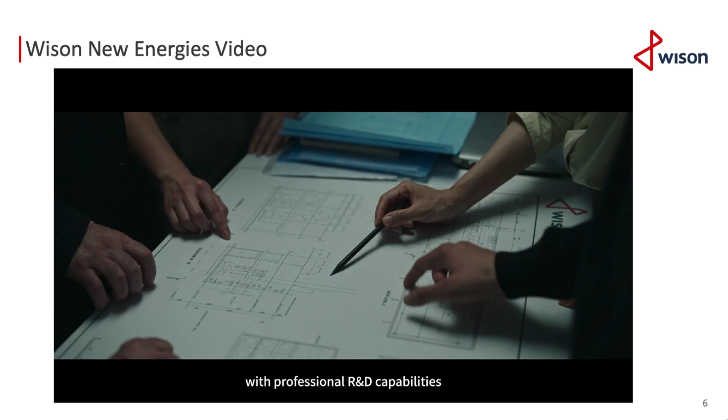Wison New Energies provides the global energy industry with professional and customized clean energy solutions. Drawing on extensive project experience, our international team continuously develops cutting-edge technologies with professional R&D capabilities. We integrate premier global resources and drive transformation by technology.

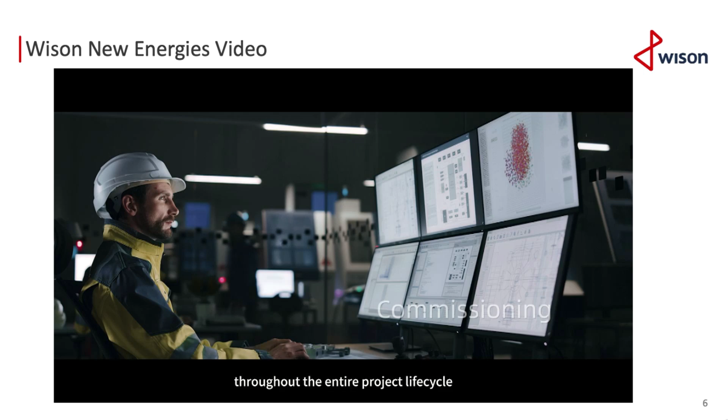Wison's robust project management and execution abilities, combined with our world-leading fabrication yards, enable us to deliver customized project services efficiently, safely, and with the highest quality. Our EPCIC solutions realize the complete resource integration throughout the entire project lifecycle, enhancing applications across multiple fields, and effectively promoting the integrated development of the entire industry supply chain.

We see endless opportunities in new energy. Lower cost, higher efficiency, broader applications, and less environmental impact, paving the way for an infinite future.

Let clean energy benefit our Earth. Let clean energy enrich every single life. Better energy, better life. This is our mission and our promise. We are Wison New Energies.

So that's where we are under all this philosophy we have, the mentality we have, and we're trying to position ourselves as a leading provider of clean energy solutions to the industry. What we present to the market is an integrated solution, starting from engineering all the way to commissioning of the floating unit that we present to the market. So every single stage along this process relies on our in-house resources, and I'm going to explain why.

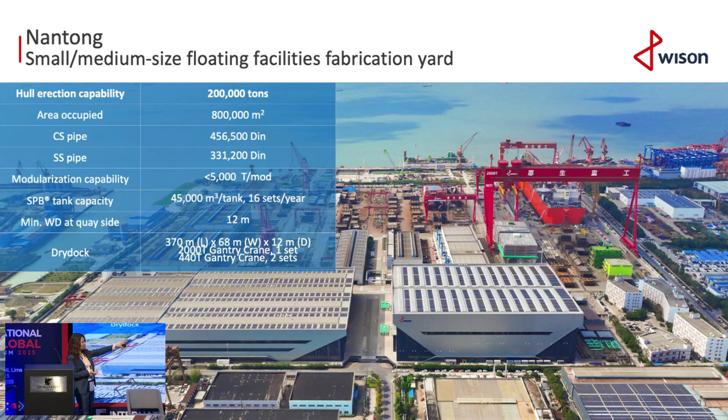This shows the geographic locations of all our 3 sites. Headquartered in Shanghai, where all our engineering and procurement teams are based, and the 2 yards are positioned in a very convenient way. That really helps minimize logistics and management overhead between all locations during a project.

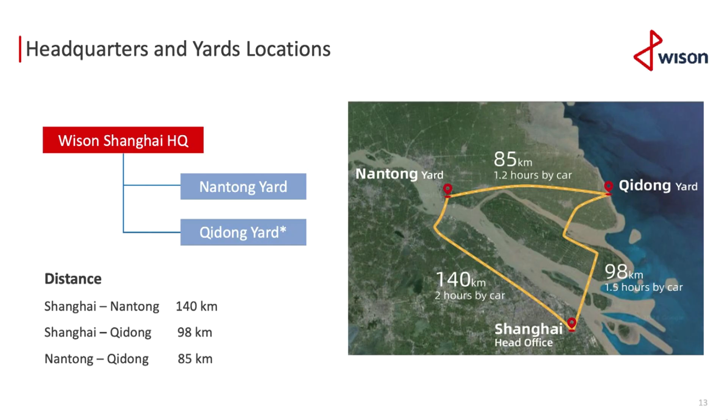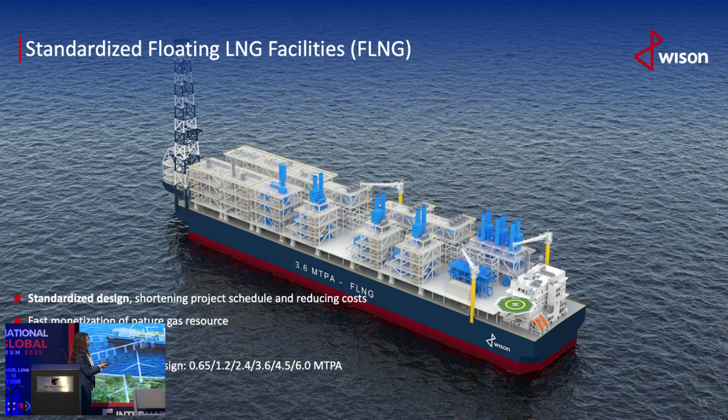I just want to highlight a few core products we offer to the market. FLNG, ranging from 0.65 all the way up to 6 MTPA. The reason we start with 0.65 is that anything below that wouldn't make the project commercially viable, so anything smaller would need a different approach.

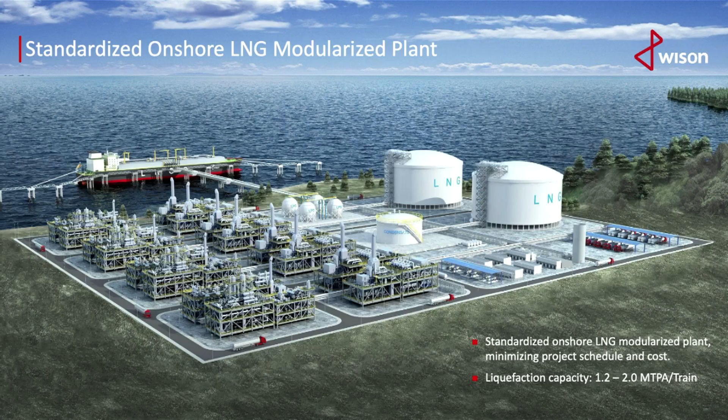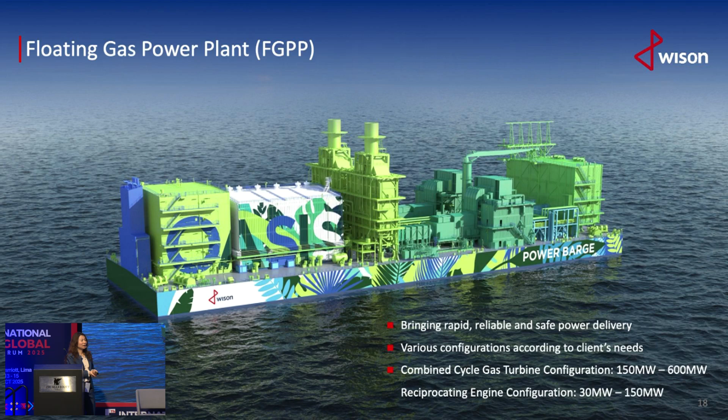This is gas to power. Carolina mentioned something about gas to power—this is an alternative solution we're providing to the market. Where building an onshore plant would be challenging, a floating solution could be an alternative. Or for emergency situations, a floating gas-to-power plant would bring certain value.

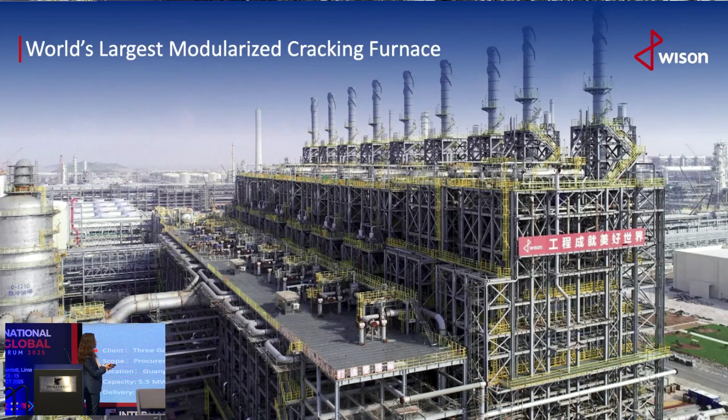So now let's talk about—I know time is short, but I'll try to cover it quickly—FLNG, this is what we offer to the market.

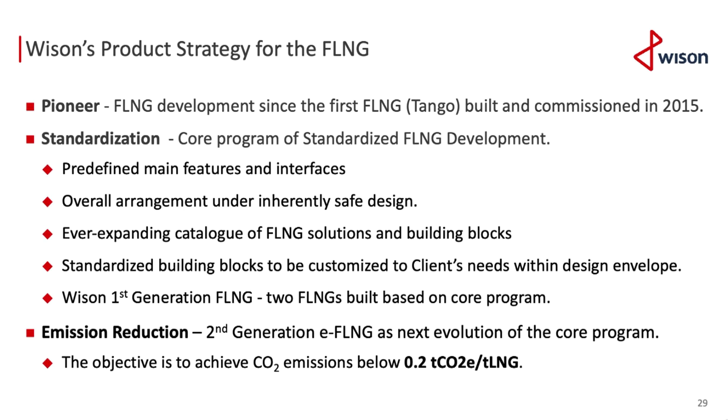Our strategy is really based on 3 keywords. Pioneer - we are among one of the first FLNG providers in the industry, and by far the only one that can provide in-house integrated solutions, relying on all the engineering up to the construction yard through our in-house resources. Standardization is another approach that makes us stand out - we have our core program to develop standardized FLNG. And emission reduction is how we focus on bringing less environmental impact when we build our unit. Our ultimate objective is to bring down CO2 emissions below 0.2 tons for each ton of LNG produced by our unit. So this gives all the aspects we consider when developing our standardized FLNG solution.

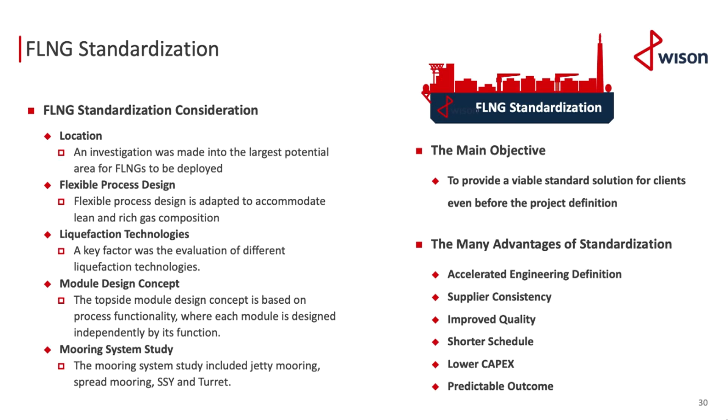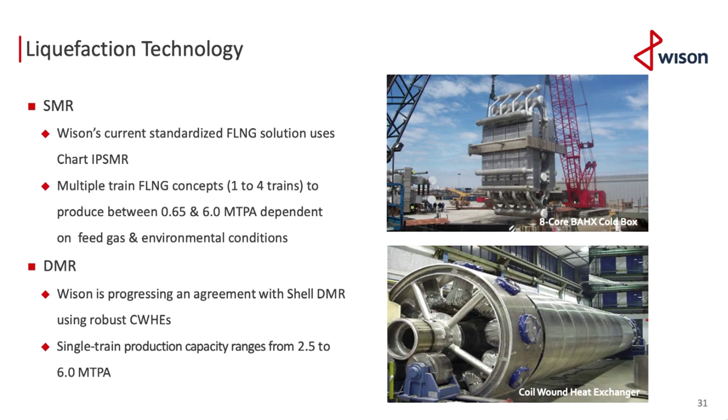In terms of technology, we are working with both SMR and DMR. Each one has its own unique strengths, and depending on the scenario of the project requirement, these two technologies can be chosen based on client preference and the actual requirement of the project.

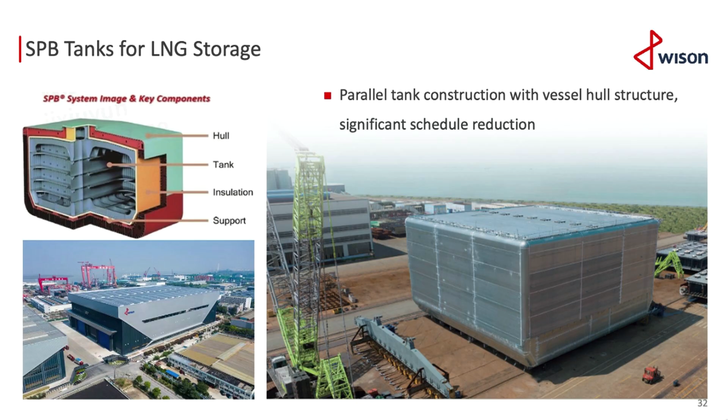What makes our solution bring certain advantages is we are using this SPB tank technology. It's a robust aluminum alloy cargo containment. We can build it simultaneously while we build the hull, and at the end we just drop it inside the hull. That can shorten the whole construction period by 3 to 6 months, and it also helps lower the OPEX because it has less concern of leakage.

This talks about our first generation, the topside, and also how we build the hull. In the picture you will see how we install our LNG tank, and what's underneath shows how the tank is about to drop into the hull.

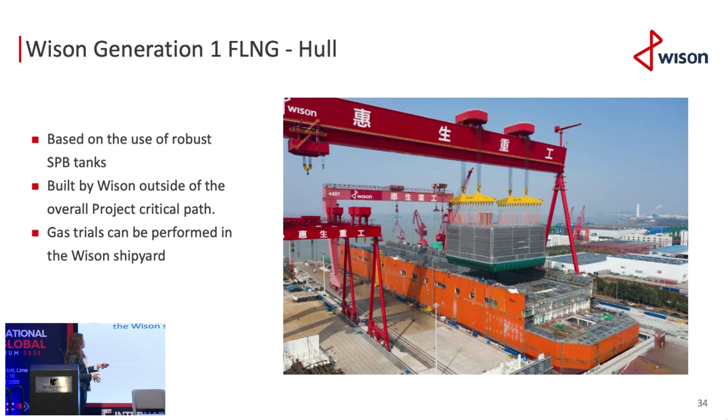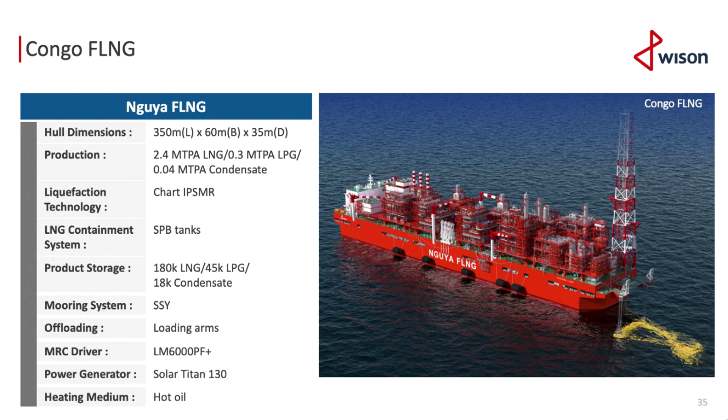Again, this is Congo FLNG. This is a glance at all the technical features. It's on the way to Congo now, and hopefully we'll start operation early next year. This is the second one we're building - both of them we call our first generation.

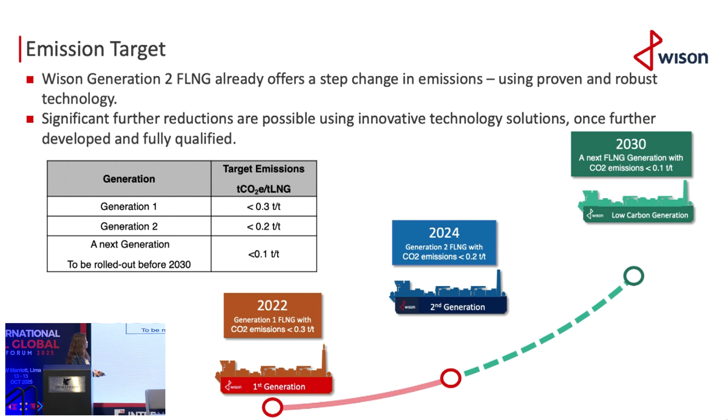Moving to the second generation - this is what I mentioned last year at GasTech 2024. Now at GasTech 2025, we released our new second generation FLNG, which is eDrive.

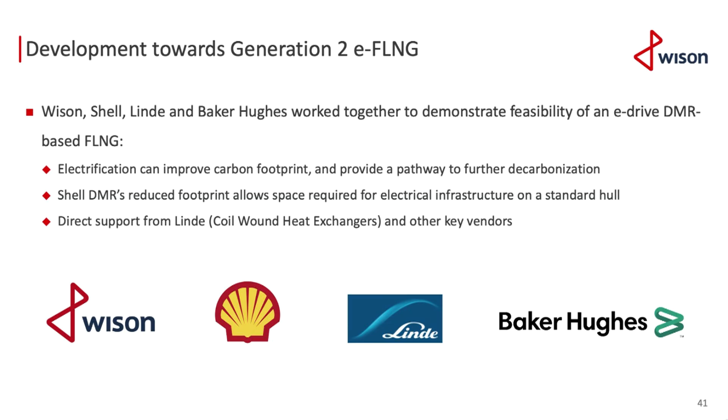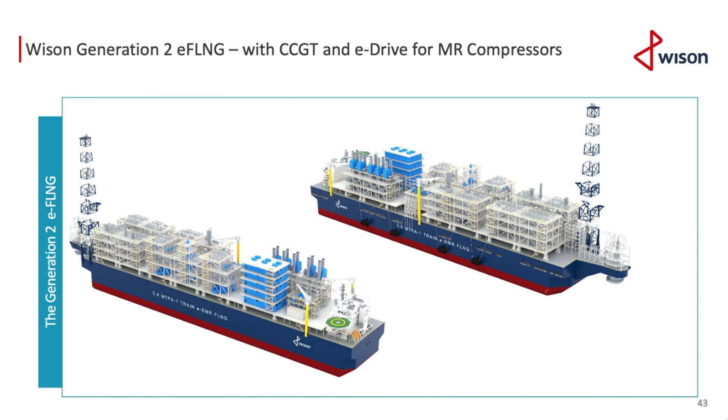The point of eDrive is that in addition to the SMR from Chart, we also brought the Shell DMR into our consideration. We also incorporated a combined cycle gas turbine so that instead of gas turbine driven compressors, we're using motor-driven compressors to bring down the overall CO2 emission.

So why do we want to consider eDrive? Again, it's about efficiency, cost, and emissions.

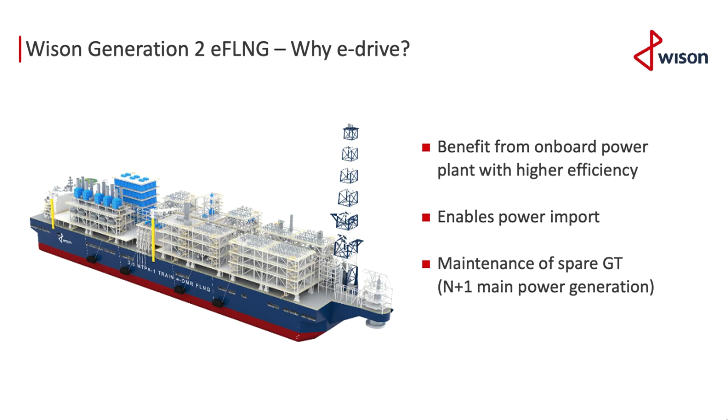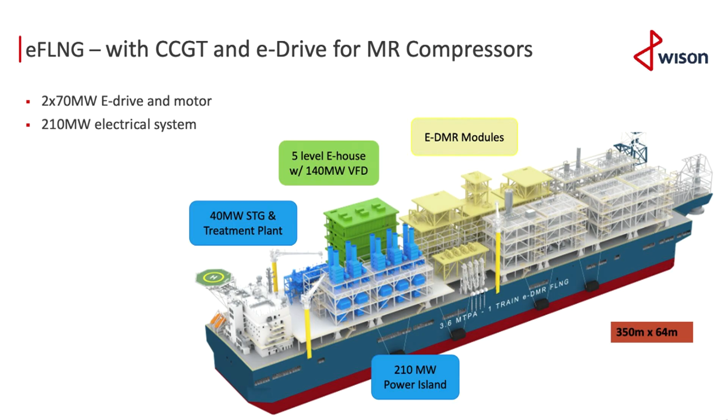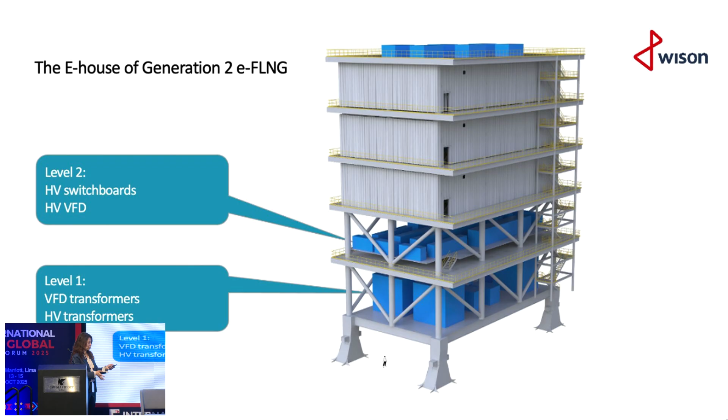Such as the e-house - for such big motors, they require really huge space. We're talking about a 5-floor high e-house sitting on top of a floating unit. This is the size of the motor, the modular motor, at real scale.

The yellow one is a small motor of 20 megawatts, and when you add the white line, that's a 70 megawatt motor that's going to be used in our second generation FLNG. You can see the increase in terms of scale and dimension.

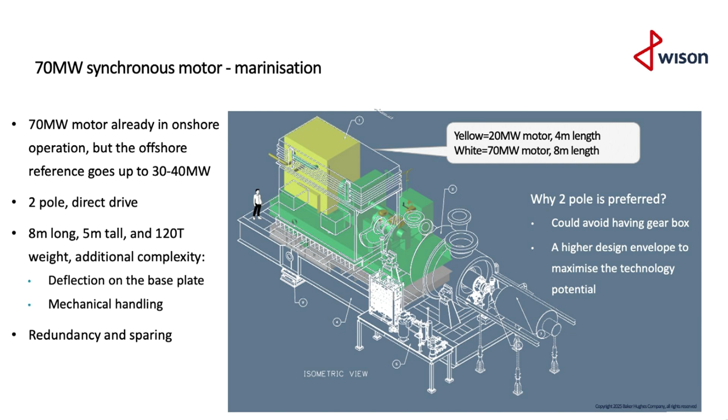So what are our conclusions for second generation? Our first generation is already in execution, like the 2 projects we showcased, and we are expanding into our second generation through new technologies. Not really new technology - technologies are already there in terms of liquefaction, but on the eDrive side we are jointly working with manufacturers to see how we can make it a viable solution.

Ultimately, our target is to achieve emission reduction - this is a very challenging target. Per ton of LNG produced, our aim is to reduce it to less than 0.1 ton of CO2. This is really challenging, but we're confident we can make it happen.

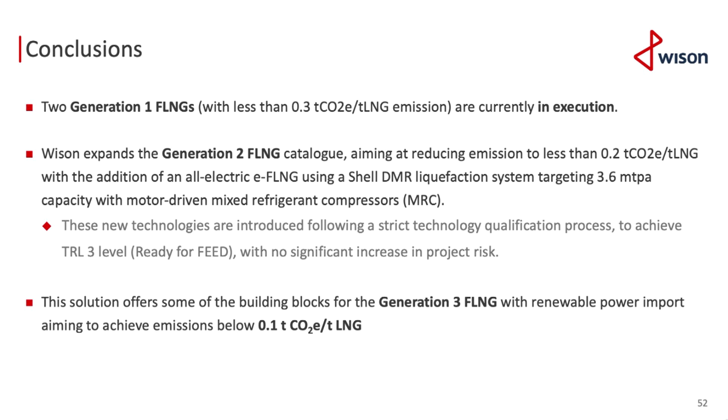To conclude my presentation, this is another video showing the whole process of how the Nguya, the 2.4 MTPA FLNG, was built from the beginning.